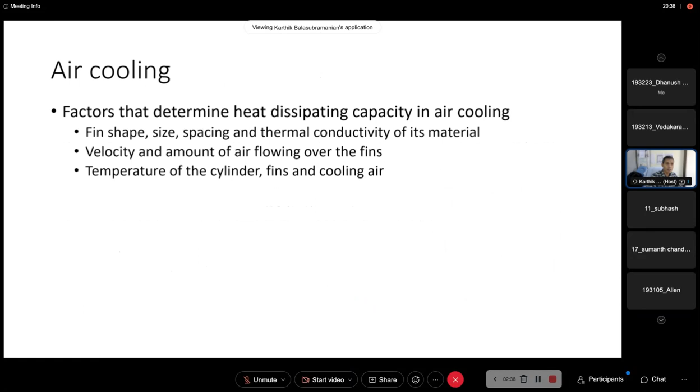Okay, so I think we discussed air cooling and then the merits and demerits of air cooling, right? I think that's what we discussed till yesterday. Am I correct? Can someone just confirm?

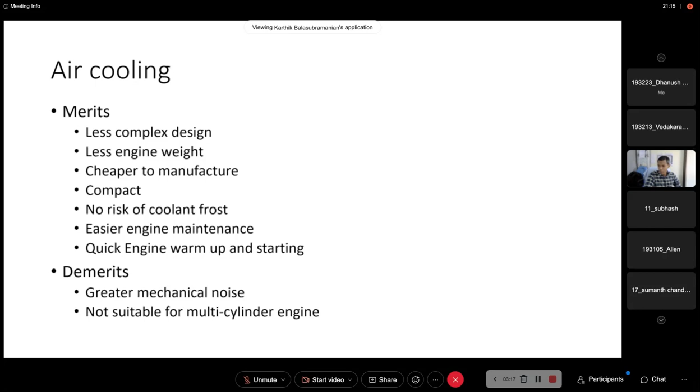Yes, sir. Yes, sir. No, my speaker has some issues. All right, but I'm sure you guys are able to hear me, so I'm just going to continue.

So next is liquid cooling.

So what's the most widely used coolant? Most widely used coolant is water, but liquid cooling is most commonly used in engine cooling systems. The reason is it has better heat transfer. Obviously, yesterday someone said that liquid has better heat transfer coefficient compared to air. When you take a combination of a certain surface and liquid, the heat transfer coefficient is much higher compared to just surface to air, right?

And the commonly used coolants are water. Even today, water is the most commonly used coolant, along with ethylene glycol, Preston and glycerin. So these are some of the coolants that are used, or a combination of some of these things. Water is most widely used due to its easy availability and high heat transfer capacity.

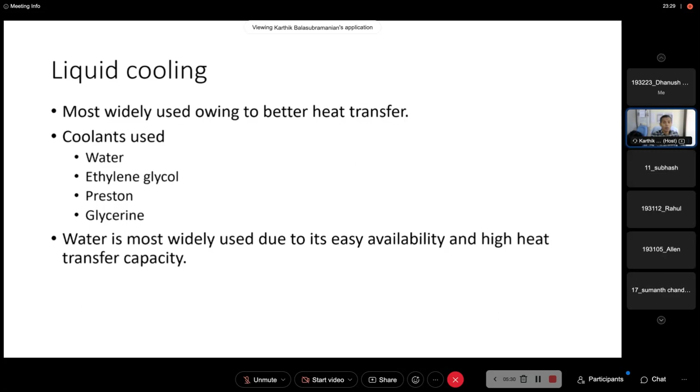Okay, what is specific heat, what is sensible heat and what is latent heat? Anyone? Sir, sensible heat is basically in order to raise the temperature. Latent heat is basically to change the phase. Sir, sensible heat is about raising the temperature of any particular liquid, sir. Latent heat is about changing the phase. Change of the phase, that's right.

So water can absorb quite a bit, the latent heat capacity is high. Even sensible heat also it can absorb quite a bit, right? So that's why water is most commonly used. But there are issues with water because of its corrosive nature and so on. But still, with proper additives and proper surface coatings and so on, you can prevent those things and still utilize the most advantageous features of water.

So if you look at pump circulation system cooling system, it has five basic parts: water jackets, water pump, then there's a thermostat to ensure that excess water doesn't flow, and then there is radiator, and then there is fan, right?

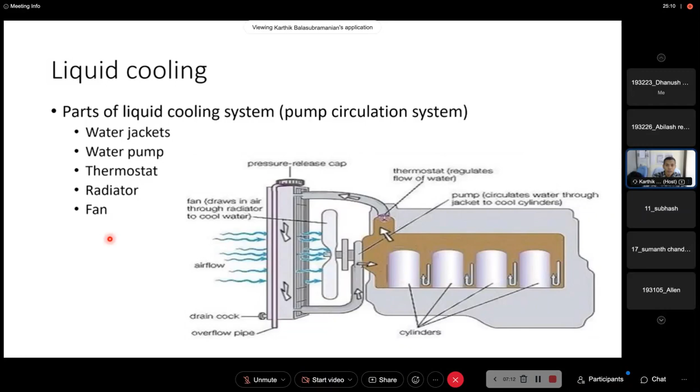So these are the water jackets. I think yesterday I was discussing, you are able to see now around the cylinder. This is piston, and the piston is moving up and down the cylinder. You can see there are gaps within the cylinder block, these slots. So these slots are nothing but slots for the coolant to flow through. Are you guys able to see this? Is it visible for you all? Yes, sir.

Yeah, it is through these slots that the coolant flows and takes away the excess heat and prevents it from getting dissipated into the other parts of the engine.

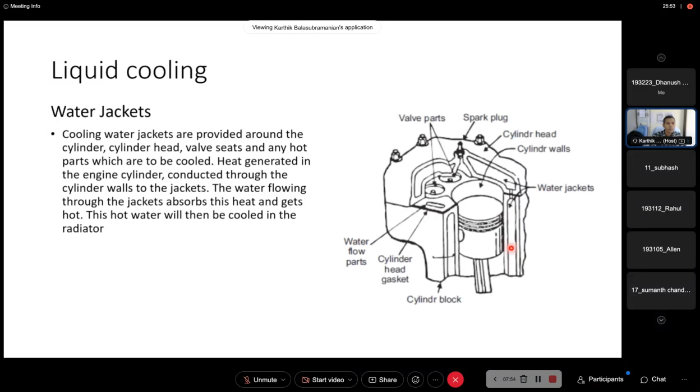Then we have water pump, used to circulate the water. Impeller type pump will be mounted in the front end. Usually we can either have a positive... I think this is a positive displacement pump, if I'm not wrong. What do you mean by a positive displacement pump? What is a positive displacement pump?

You don't know what's a positive displacement pump? The output of the pump cannot be zero, that's a positive displacement pump. If you close the valve, if you make the output of the pump as zero, then what will happen? The pump will break, the weakest part will break. If the valve is weak, the valve will break. If the pump is weak, the pump casing will break, whatever, accordingly. Or some of the pipe regions may break. So can you give examples of a positive displacement pump?

Gear pump, vane pump, reciprocating pump, piston type reciprocating pumps - these are positive displacement pumps. When they say impeller, you have to check whether it is positive displacement or simply a centrifugal pump. A centrifugal pump can have zero output as well because it will keep churning the water inside the casing.

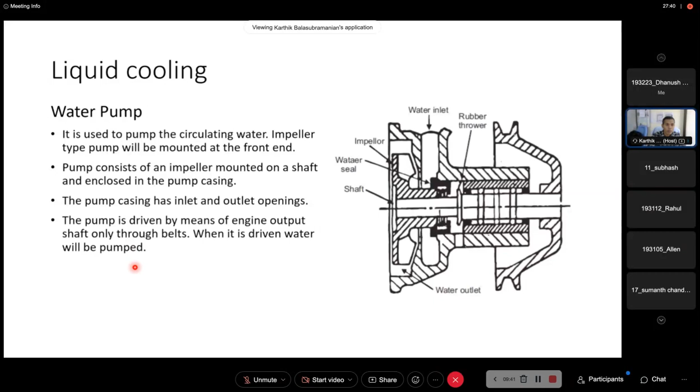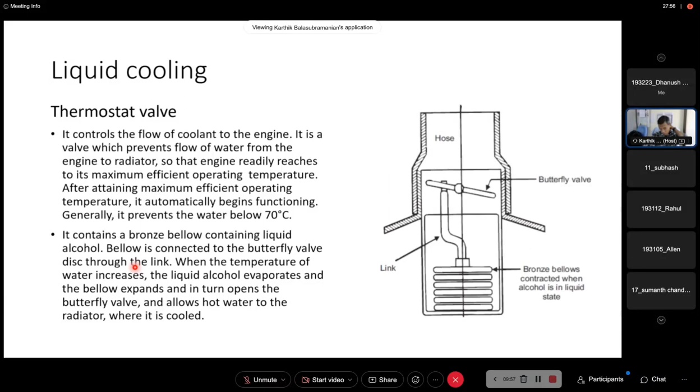The pump is driven by means of the engine output shaft through belts. When it is driven, water will be pumped. Then you have a thermostat valve to control the coolant flow to the engine, neither allowing excess flow nor insufficient flow, ensuring appropriate flow of fluid to the engine. That is the use of the thermostatic valve. You can read those details.

Then of course we have the radiator. A radiator is used for cooling the coolant. The coolant flows through the radiator, and then there is a fan which sucks the air through the radiator. When the vehicle is moving forward, the draft facilitates the airflow and makes it easier for the air to be sucked through the radiator grills.

You can have several types of radiators - serpentine tubes, tubular, cellular type - different types to enhance the heat exchange between the hot coolant and the surrounding atmospheric air. The atmospheric air is used to cool down the coolant, and then the coolant flows back through the pump into the parts of the engine. That's what a radiator does.

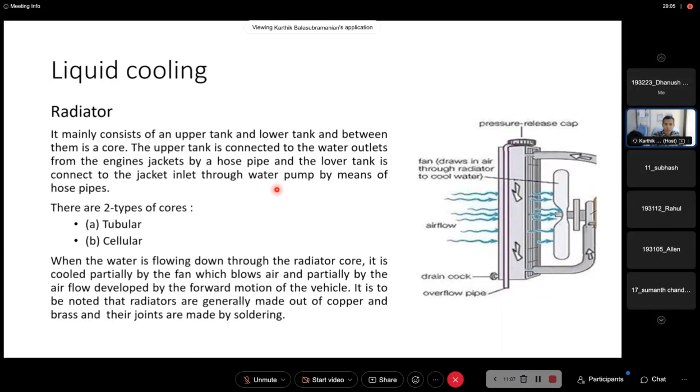The fan is driven by the engine output shaft through the same belt that drives the pump. All these components are driven by the power from the engine. So when you have a liquid cooling system, it takes certain excess power from the engine to drive all these components, whereas in air cooling, as we discussed before, it's not as complex as this.

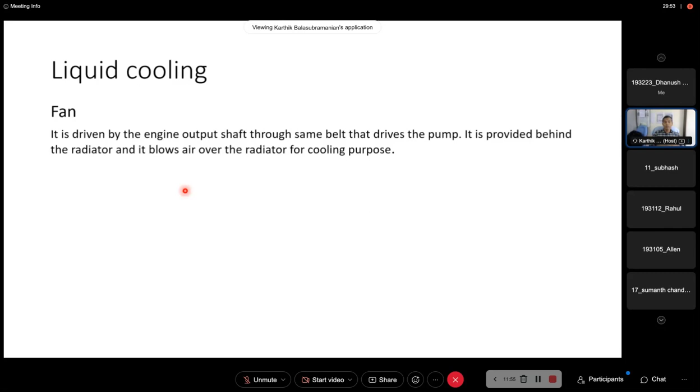The construction is easier, the cost wise it is low, but it has its own disadvantages and advantages. Here also you have disadvantages and advantages. But usually the liquid cooling system's advantages outdo the advantages of an air cooling system, because we want to maintain the temperature of the engine at a certain level, achievable only by a liquid cooling system, particularly for multi-cylinder engines with cylinder blocks and so on.

This is a typical engine cooling system. You can see there is a radiator and a fan, and then there is the coolant storage tank, and then the pump. This pipe goes to the engine fluid and then comes back. You also have some being used for a heater inside the cabin and so on, return hose and fan. This is how a typical cooling system looks like. The engine is not shown here, but it is connected so that the fluid flows through the engine and comes back.

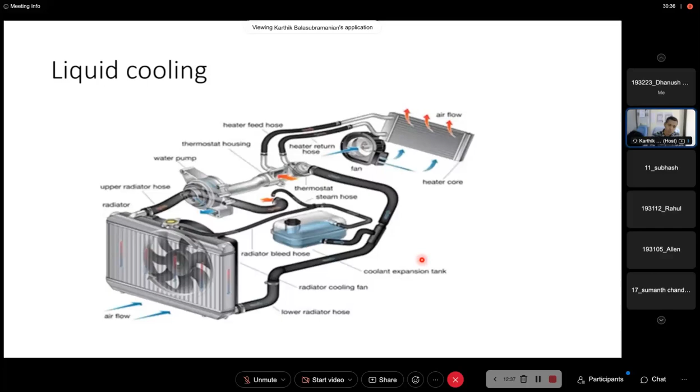This is a simple line diagram of the engine cooling system. In the exam, you can draw something like this - that's also good enough. You can show the cylinders and then how the fluid goes around the cylinders to carry away the heat, then it comes from the pump, and then again after going through the engine components, goes back.

It goes back to the radiator. So why is the supply line at the bottom and the exit line at the top? Anybody? Why is the coolant coming from the bottom and going out at the top? Why not the other way? Is there a reason, or can we have it anyway?

Sir, when the water absorbs the heat, there might be some density variation. Yeah, Abhilash, what is it? Density? Sir, when compared to the normal water and the water which absorbs the heat, there might be some density variation. Is that the reason, sir?

Yeah, so naturally the hot fluid tends to rise up. It's easier for the pump to operate - it will push the cold fluid below, and because of the heat, hot fluid can easily rise up due to low density and it can flow. So this concept of density difference is used in a thermosiphon system. This is a pressure system, you have a water pump here. You can also have a thermosiphon cooling system where just by the density difference, the fluid flows around the system.

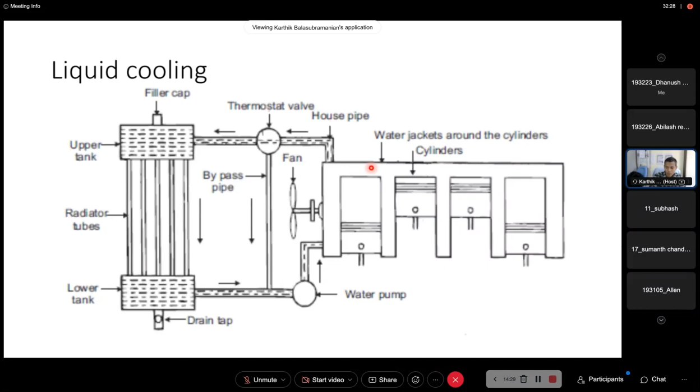Anyway, we will look at it later on.

So you see liquid cooling, what are the problems? Air in the cooling system - if there are air pockets, if there's air entrainment into the system, then you will not have effective cooling because of the presence of air inside the system. Also, the coolant can get frozen.

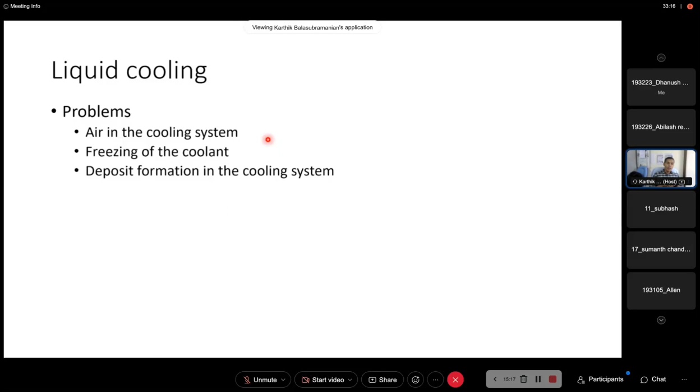Freezing of the coolant is another problem. And then deposit formation in the cooling system - if there is debris and dirt, because there is enormous piping and water coolant passages, these passages can get clogged up because of deposits and dirt. So that is also another problem with liquid cooling. You have to ensure that those passages are always maintained clean and free for the coolant to flow through.

So as I said, this is called the thermosiphon system. In thermosiphon system, it's exactly the same system, but the fluid circulates only because of density difference. Since it completely relies on density difference, you need a large quantity of fluid, because with a pump you can ensure flow by the work done by the pump. But now, since we are only relying on density difference for the fluid to flow up and down, we need large quantities of coolant to ensure there is no dearth or lack of supply. So it has to be quite bulkier in size compared to a pressure system. That's another important consideration we have to ensure.

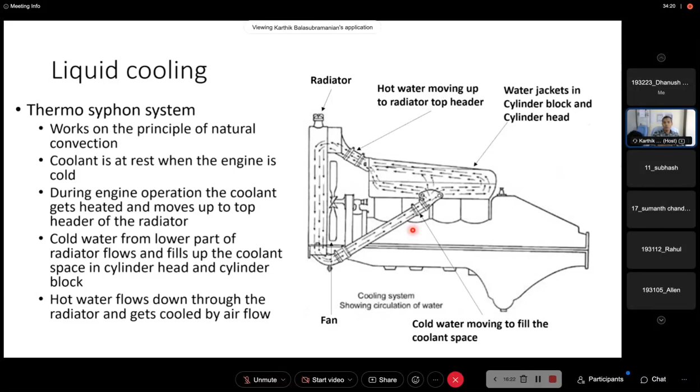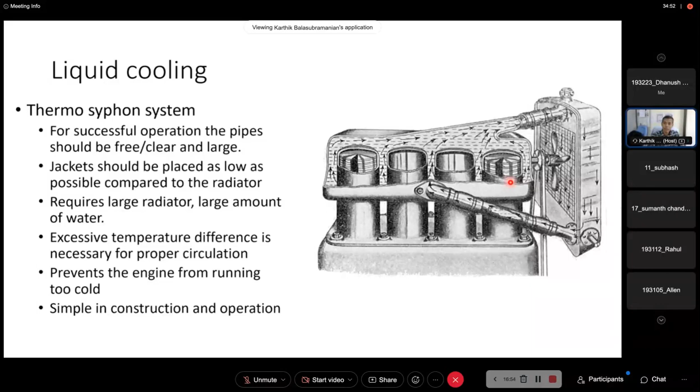So you can see this is typically a thermosiphon system. A thermosiphon system is not used anymore. Most cooling systems use water pumps to pressurize the coolant and make it flow through the different components of the engine. But it has its advantages because it's simple in construction - you can get away without the pump, and it doesn't consume extra power from the engine for circulating the water.

Okay, so that is what we have with the cooling system. Now we are moving forward with the lubrication system. So what are some of the functions of a lubricant? The primary function is of course to reduce friction between moving parts. We have several moving parts in the engine and it has to minimize the friction between those moving parts. That's the primary function of a lubricant.

But there are several other functions. It has to remove the heat generated by friction. So it's not just minimizing friction, but also because of repeated movement of the parts, a lot of heat is generated, and you have to remove that heat also. So the lubricant takes care of that. That's the reason the lube oil has to be changed after every several thousand kilometers. You see that in trucks and even in two-wheelers, they keep changing the engine oil. You're all aware of that. The engine oil has to be changed frequently.

Yes, sir. Yes. Yes, sir.

The reason is over a period of time it gets contaminated because it's subject to severe amounts of stress and heat. It acts as a seal between the piston ring and cylinder - the lube oil is actually the final sealant between the piston and the cylinder, so it acts as a fluid sealant. And then it fills the clearance between bearings and rotating parts. You all know journal bearings, right?

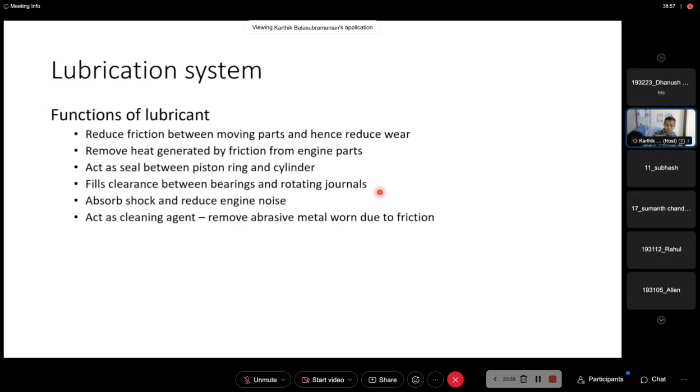So then, what are some properties of the lubricant? It has to have proper viscosity - that's the most important property. It should be neither too thick nor too thin. If it is too thick, it cannot flow easily to all the engine parts.

If it is very thick, for example, grease will only stay in one place. It cannot move to all the parts, whereas oil can flow. But if it is too thin, very low viscosity, it will not stay in place - it will just flow down. So you have to have the optimum value of viscosity so that it stays in place as well as flows through the necessary gaps to lubricate the moving parts.

That's called viscosity index - a measure of viscosity change with temperature, how the viscosity changes with temperature. Obviously, most of the oil's viscosity...

It's a quiz question for all of you. What happens to viscosity of a gas when you increase the temperature? For liquid, what happens? Viscosity decreases when you increase the temperature. What happens to a gas when you increase the temperature? It increases. It's an important question - go back and study the reason why. For gases, usually viscosity increases with temperature, but there is a range and there are some conditions for it. Just look through it.

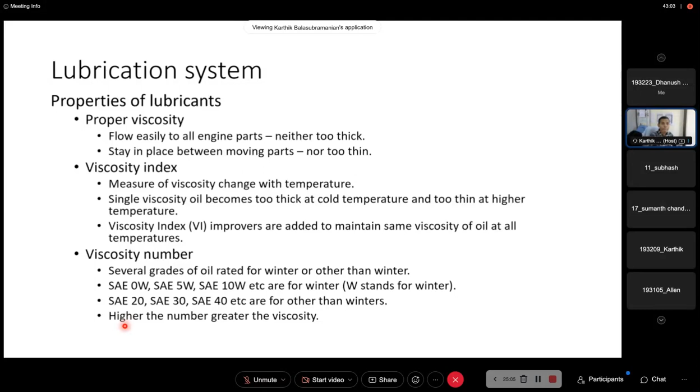There's something called multiple viscosity oil, which has different viscosity at different temperatures. They use a certain low viscosity oil for cold climates, and high viscosity oil for hot climates. There can also be a mix, like SAE 5W30, so the oil can handle both temperature ranges.

Then the oil or lubricant should be resistant to carbon formation or oxidation. The more carbon formation happens within the oil, the quicker it will lose its viscosity property. That's why it should be as resistant as possible to carbon formation and oxidation.

And it should prevent corrosion. Lube oil should prevent corrosion - it's a very, very important property. Also, it should resist foaming.

What is foaming? Usually when you add water to oil and churn it, it forms froth and foam. Have you seen that? Yes. So foaming is caused due to the churning action of the crankshaft.

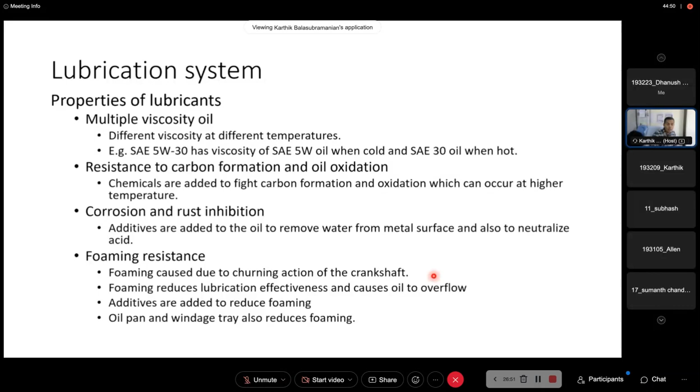It's not just the churning action of the crankshaft, but also the presence of certain amount of moisture inside the crankcase. When moisture gets mixed with oil and there is enormous churning of the crankshaft, a lot of foam can be formed. Foam reduces the lubrication effectiveness and causes oil to overflow. That's why additives are added to reduce this foaming.

Then there is something called detergent dispersants. It loosens and detaches carbon particles from the engine parts, which is then carried away by the oil - like a cleansing action to ensure carbon particles are removed from engine parts. Usually detergent dispersants bring down the surface tension of the fluid, which also helps in free flow and cleansing of the different parts.

The oil should also have extreme pressure resistance because the engine is subjected to very high pressure in the bearings and valve train. As we discussed with journal bearings, the fluid is subjected to very high pressure, also in the valve trains. So it should be able to resist oil penetration and resist decomposition due to high pressures.

Then there's something called energy conserving oil, which improves fuel economy - it effectively brings down the friction, that's it. Then synthetic oil, synthesized from carbon components and alcohol or coal and crude oil, tolerates heat better and produces less sludge. Sludge is the foaming due to mixture of moisture, oil, and dirt together. Synthetic oil minimizes the formation of that sludge.

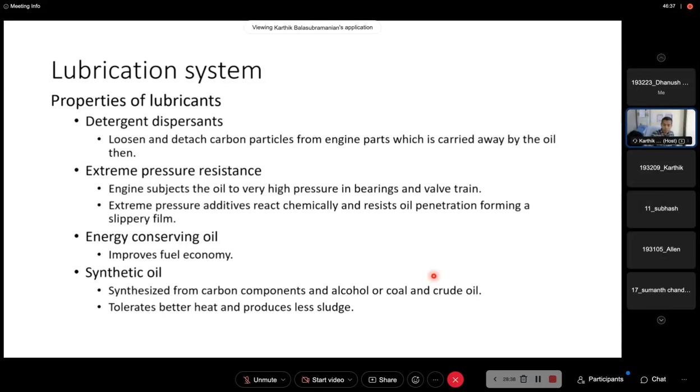So what are some engine parts that require frequent lubrication? Obviously, piston cylinder and piston rings, and main bearings. What are main bearings? Main bearings are nothing but those bearings which hold the crankshaft - there are several bearings which hold the crankshaft, and those are called main bearings.

The large end of the connecting rod - big end and small end of the connecting rod. You all know what a connecting rod is, you can visualize it.

What is crank pin and what is piston pin? It's the connection between crank and connecting rod - the part which comes in contact with the connecting rod. So piston pin is where the connecting rod is connected with the piston, and crank pin is where the connecting rod is connected with the crankshaft. So small end and big end - small end is where the piston pin will come, big end is where the crank pin will come.

Then you have the camshaft, then you have valves. There are several other parts, but these are the prominent parts that require frequent lubrication.

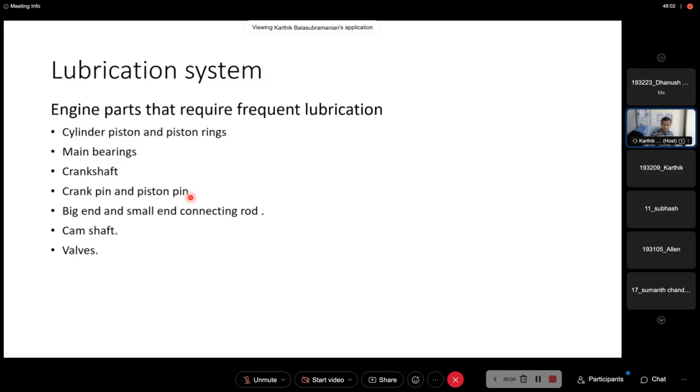So what are some of the methods of lubrication? We have mechanical or splash lubrication system, pressure lubrication. Pressure lubrication includes wet sump and dry sump lubrication, and then there is semi-pressure lubrication system, and then there is something called the petroil system.

This mechanical system or splash lubrication system is a very old system. We don't use it now. So what we may be using now is mostly pressure lubrication system where a pump circulates the lubricant throughout the engine components. Semi-pressure is a combination of pressure and mechanical. It's not purely mechanical, it's half pressure and half mechanical. So that also may be used in some cases.

Petroil system, also known as mist lubrication system, is obsolete and not used now. But does anyone know what this petroil system is? Can someone guess? Any guesses? I'm pretty sure you must have seen it. Anybody? What is this petroil system?

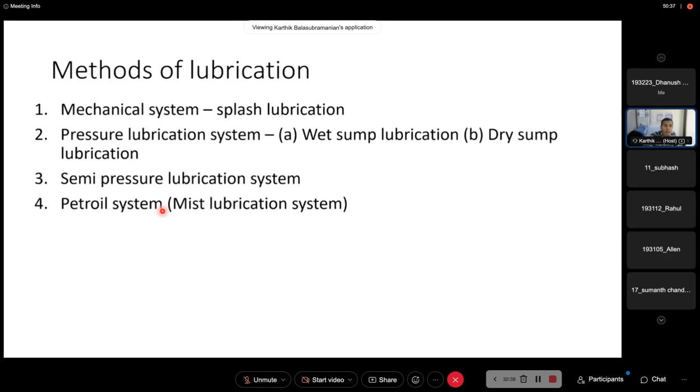There are reasons for it, we will discuss that in detail. Okay, just to complete very quickly, I'll tell you the gist of all these things. You can read the details.

When it comes to mechanical system or splash system, it's very simple. You have the engine at the bottom, with the cylinder, piston, connecting rod, and crankshaft. Below the crankshaft is the crankcase. Usually the crankcase acts as an oil pan where the engine oil is stored, a deeper tray which holds the lubricating oil. That's how you pour oil into the engine, and there is a long rod, a dipper rod, by which you can check the level of the oil - you pull it out and see the level of the engine oil.

So if you have that oil pan filled with oil below the crankshaft, there will be a dipper attached to the big end of the connecting rod below the crankshaft. Every time it comes down and goes up, it splashes the oil around to the different parts of the engine. That is mechanical or splash lubrication system. The only problem is it's very hard to lubricate the components on top of the engine, like the valve trains and camshaft. That's the problem in this case.

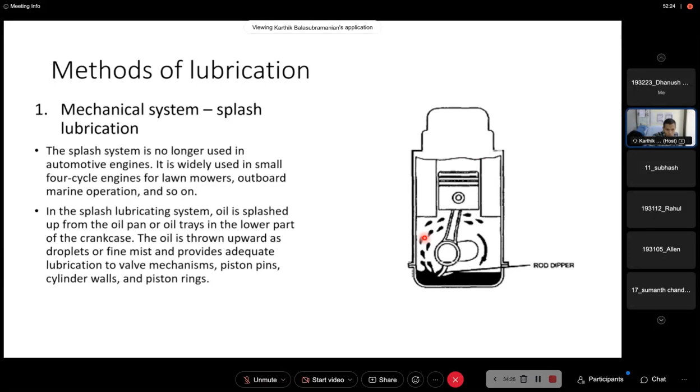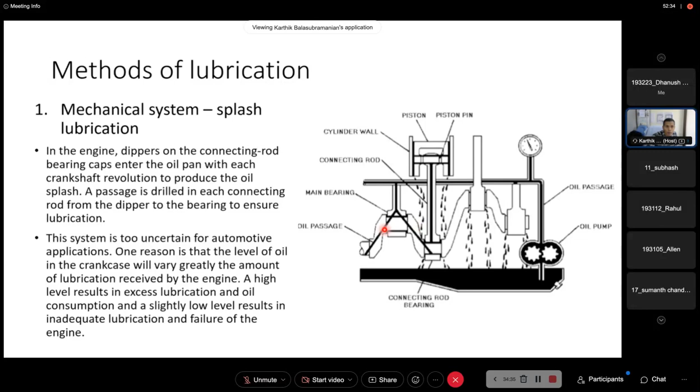So you can see - this is not mechanical or splash lubricant, this is a pressure system. I think the diagram is wrong here. In pressure lubrication system, on the other hand, it's the same oil present inside the crankcase, oil pan at the bottom, that's why the engine is a bit deeper. Maybe I have to show you.

Is there a way I can draw? Try. I can draw on the screen. Are you guys able to see anything? Is it visible what I'm writing on the screen? No, sir, no. Am I still connected? Yes, sir. Nobody's responding - oh, you're responding but I'm not able to hear probably.

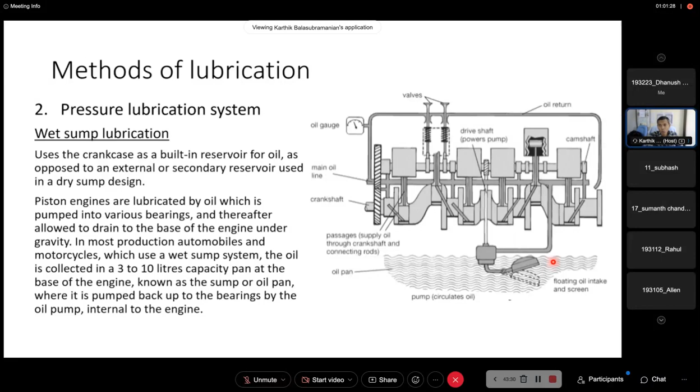Now, in a wet sump, since it's a submersible pump, the orientation of the engine can sometimes leave the pump exposed without any oil. Let's say the engine moves to one side, because of the movement, all the oil can get stored up in one side or the other, and it can keep moving within the reservoir. So the pump may sometimes be submerged and sometimes not, and orientation effects will cause issues. But here, orientation is not an issue because it's in a separate reservoir.

And then you have the flexibility of positioning the reservoir anywhere you want within the vehicle. And then there is another important advantage.

Now, when the crankshaft is rotating in a wet sump lubrication system, sometimes the oil tends to get around the crankshaft because it is just below it. When you try to move your hand within a fluid, you experience greater resistance. You move your hand in air, you don't experience so much resistance, but try moving your hand inside water, you have extra resistance. Same way, when the crankshaft is rotating freely, it experiences lesser resistance. But when the lubricating oil gets around the crankshaft, which is possible in a wet sump system, the crankshaft experiences resistance, and the power output can be jeopardized.

Whereas in a dry sump lubrication system, the oil never gets around the crankshaft because it is kept separately. This advantage enables the crankshaft to run with least resistance, and you get quite a bit of increase in power output. That's why expensive cars use dry sump lubrication systems and have better power output.

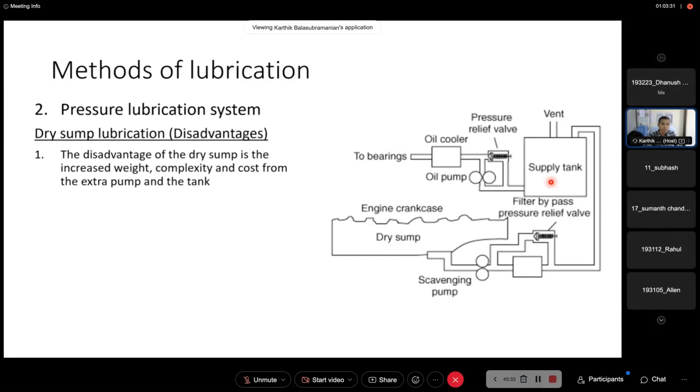Semi-pressure is nothing but the combination of a splash and pressure lubrication system. In a petroil system, as I said, you pour the lubricating oil into the fuel tank along with the fuel. So the advantage is that you don't require a separate lubricating system. There's no maintenance cost and the weight is reduced because you don't have separate components for this system.

But the disadvantage is that if the oil is less, there is a chance of engine seizure. But if you add more oil, then excess smoke will come because it pollutes the fuel, the fuel is not pure anymore since you're adding oil with it. That's why people have started avoiding it. It's almost obsolete, nobody uses a petroil system anymore for lubricating the engine, even in two-wheelers. They only use semi-pressure or pressure lubrication systems.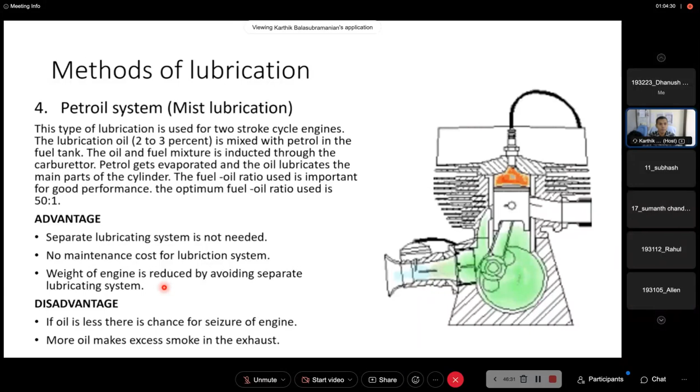Okay, so there are other components like oil filters, oil pump and oil cooler. And then there is a short write-up on sludge. You can see this is what sludge is all about, it's a combination of oil with moisture within the crankcase along with dirt. So usually desludging has to be done, frequent cleaning of the engine parts has to be done. Otherwise, it can be quite corrosive and it can affect the efficiency also.

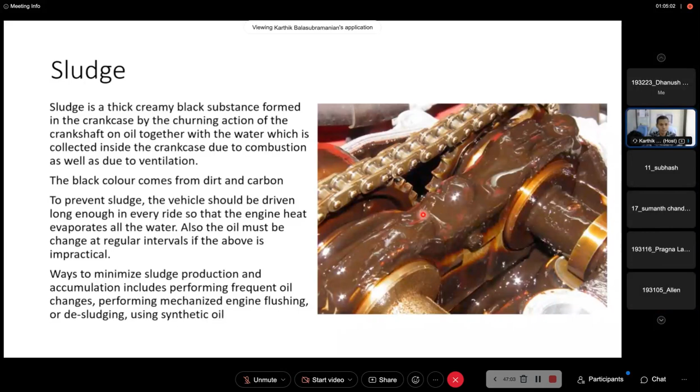So that's about it for cooling and lubrication system.